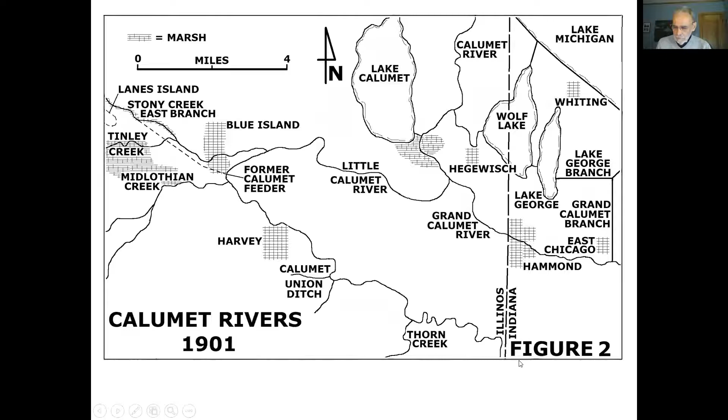Farther to the west along this Sag Valley, we see the Stony Creek flowing to the north and then south and on to the west through the feeder to the I&M Canal. Now, the Sanitary and Ship Canal had just been opened in 1900. There was no connection between the I&M Canal and its feeder and the Sanitary and Ship Canal.

Also shown are some of the natural drainage with the marshes along the valley bottom. A slight rise in the land here, Lanes Island, was the site of the village of Worth. Otherwise, there were no settlements along the Sag Valley until you got to Blue Island at the east.

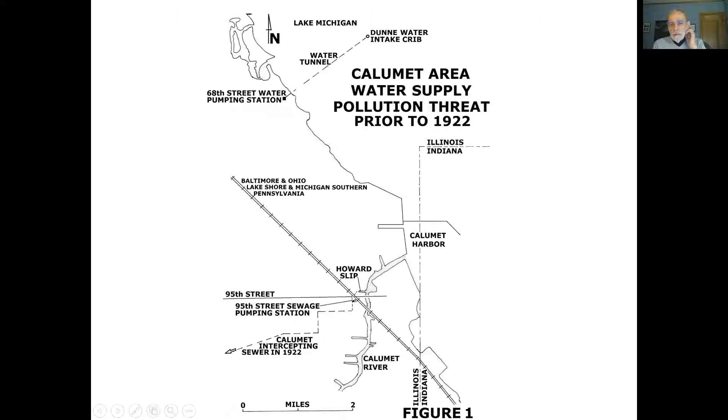This was a continuing threat for public health in the south side of the city. That was up until 1922 when the district implemented this plan to arrest the discharge of sewage into the Calumet River, by building a sewer that took away flow from the 95th Street pumping station. More detail on that in a little bit.

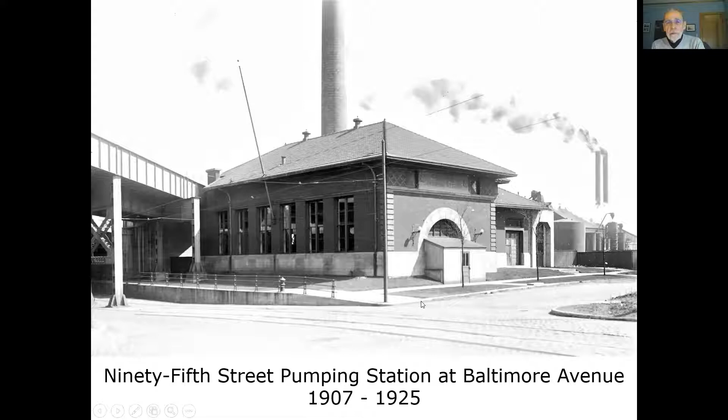So by 1911, it was known that dilution wouldn't solve the pollution problem for Lake Michigan or the Chicago River or the Calumet River. And the plan for the Calumet area was to build intercepting sewers to stop the discharge of sewage to the river, to build a pumping station to replace the 95th Street pumping station, and another one over near the plant that was to be built on 130th Street. And then a plant to treat the sewage and a canal to carry the treated sewage away from Lake Michigan.

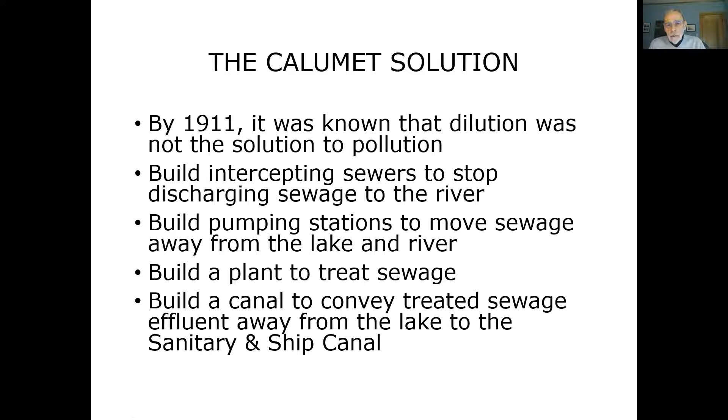The canal that was built, of course, was the Calumet Sag Channel, 16 miles in length from where it connected to the Sanitary and Ship Canal near Lemont, running east over to its connection with the Little Calumet River east of Blue Island in the village of what is now Calumet Park.

Originally, the plan was to extend the channel over to the mouth of Lake Calumet, but with the federal government opposed to any more diversion from Lake Michigan, the size of the channel was reduced and it was terminated at the Little Calumet River near Blue Island.

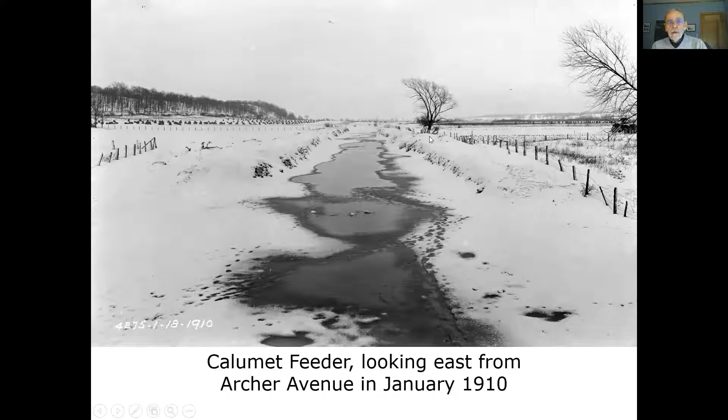Building this canal was a challenge. The Sag Valley was less inhabited than the valley of the Des Plaines River where the Sanitary and Ship Canal was built. Here we are at the west end from Archer Avenue looking east during the winter of 1910. This is the Calumet feeder, pretty much blocked by debris and vegetation by this time because it had stopped being used with the lack of business on the I&M Canal. And here we see the bluffs to the north and the south in the distance.

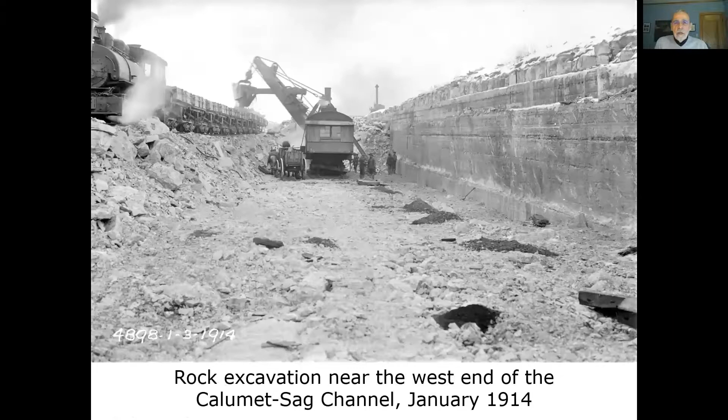The western 2.5 miles of the canal was in rock, and here by vertically cutting the wall of the rock for a channel, and then drilling and blasting the rock out, they excavated this channel. And the spoil was loaded and hauled away.

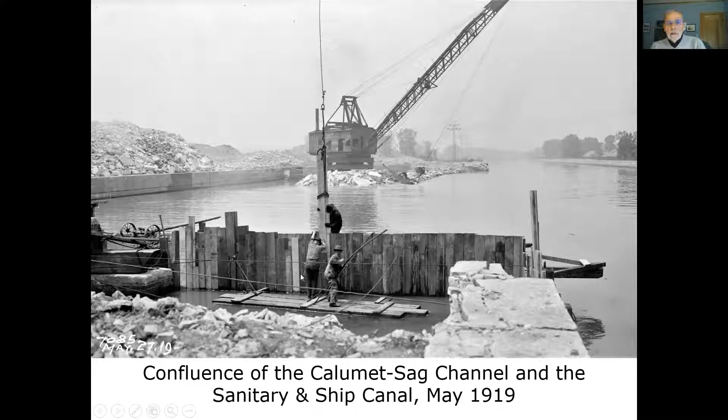A big challenge on this end was connecting the new Calumet Sag channel to the Sanitary and Ship Canal. The Sanitary and Ship Canal is over here on the right. With the new canal walls that were built, a dike was left here where the east wall of the Sanitary and Ship Canal was. All of the construction work on the new canal was done in the dry, and then this dike was removed here. You see the drag line working its way backwards, removing that fill. In the foreground, laborers are building a cofferdam to connect the old wall of the Sanitary and Ship Canal with a new wall of the Calumet Sag channel.

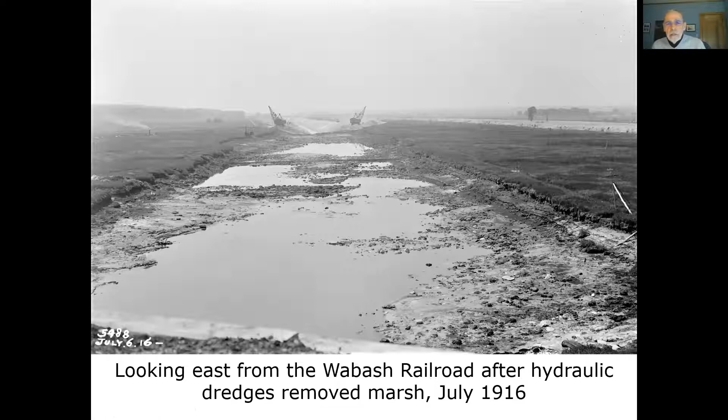This 11 miles of channel had unstable side slopes, and it was entirely lined with hand-placed rock riprap, a very labor-intensive process you see here. And the channel itself was only 60 feet wide, the same width as the Illinois and Michigan Canal, built half a century earlier. The small channel was because of the federal government not allowing more diversion, so only a small channel was needed.

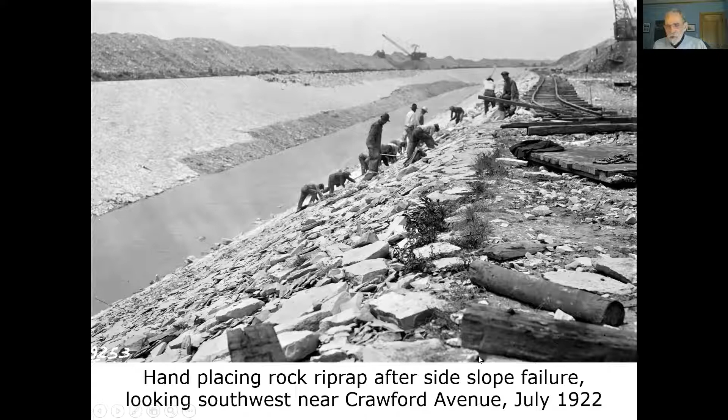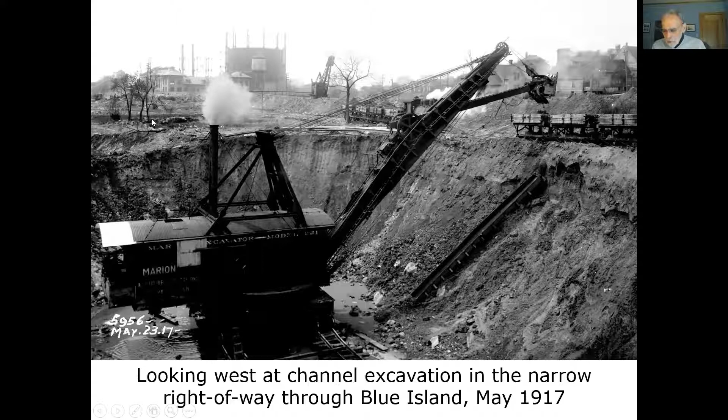The eastern 2.5 miles went through the city of Blue Island and over to the Little Calumet River. Working conditions were rather restricted going through the urban area of Blue Island. Here you see the gas plant in the background, and the channel is coming just to the south of the gas plant. Again, the spoil was loaded on rail cars and hauled away. And concrete walls were built here. There wasn't any rock at the depths of the channel. Sometimes the walls were founded on rock. It may have been down there 20 or 30 feet.

Here we are to the south of the gas plant. You see the village of Blue Island up on the higher ground here, a 60-foot wide channel contained within concrete walls. This is the contractor's way of moving his materials from a central concrete mixing plant to where the walls were being cast with this false work.

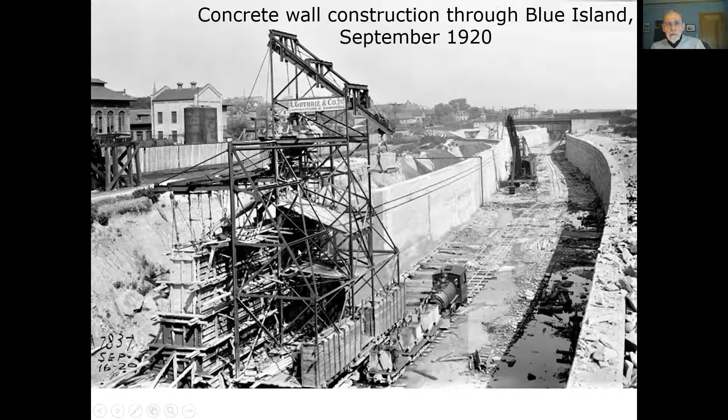At the very east end was the construction of the Blue Island Lock. The lock walls here, these two recesses are for horizontal sector gates. There are two more recesses in the back for the lock chamber to have gates at either end. And this is falsework and a stiff leg derrick for erecting the gates in these two recesses.

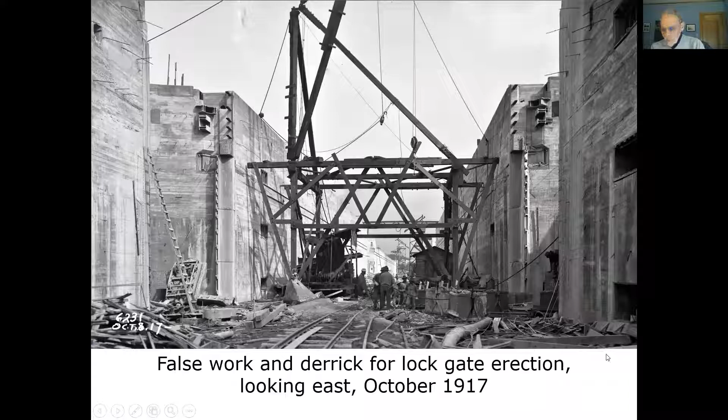At the very east end, we had this levee along the river. Here's the Little Calumet River in the background. The levee isolates the work area from the river, and one canal wall, the north wall, is coming up here and tying into the higher ground. In the background is the south wall. And in the right background is the lock construction.

Oh, this was very challenging to complete this channel, and it took 11 years, started in 1911 and ended in 1922. A large part of the delay was due to World War I and the delay in obtaining materials, shortage of labor because young men were going to fight the battles in Europe, and also a lot of railroad equipment was embargoed by the federal government to use for moving war goods to the seaboard.

As I said, there were many railroads. There were 7 railroads that had to be crossed. This was the Wabash Railroad. Can you see here, the new bridge is raised up above the valley floor. They didn't like the track flooding, so the railroad built the bridge, but the district paid for the bridge. The railroad paid for raising the embankment on each side of the valley floor to raise the grade above the flood levels.

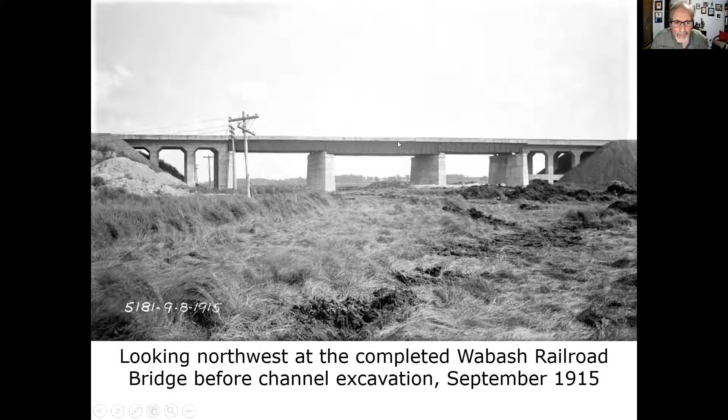Another was, here we are in Blue Island, looking north. This is Western Avenue coming down, and the original bridge crossing Stony Creek was right at this location. They're building a new bridge to cross the new channel because the channel was built right in the bed of Stony Creek. A bypass was built around here so Western Avenue traffic could continue. And over to the right, we see the embankment of the Rock Island Railroad. Stony Creek is still flowing underneath all of this in a wooden flume under Western Avenue, under the railroad, and on over to the river.

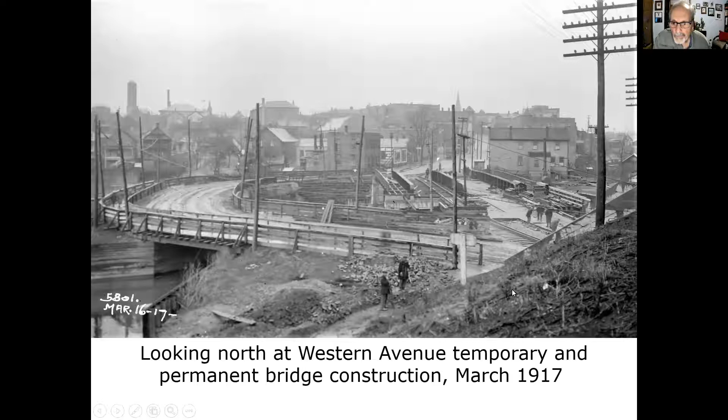Here's the railroad bridge just east of Western Avenue, and the 2 walls of the channel. The railroad for construction is here with a break left in the wall for access. Now today, if you drive through Blue Island on Western Avenue, you don't go under the Rock Island Railroad, you go over it. So that construction occurred later when the Calumet Sag Channel was widened in the 1950s and 60s.

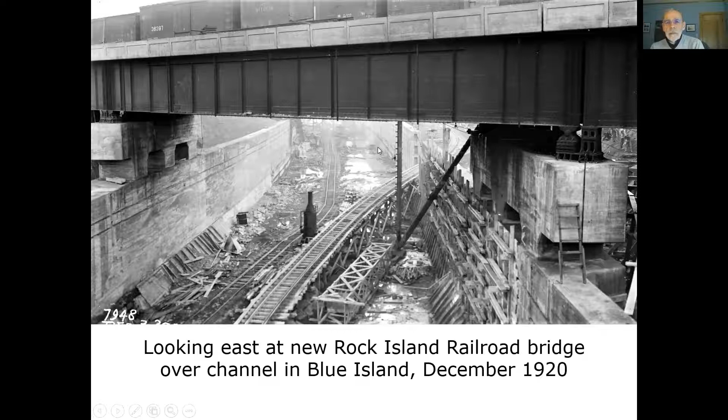Typical road bridge away from Blue Island. In Blue Island, the bridges were a little wider and they had sidewalks, but these road bridges outside of Blue Island had no sidewalks. And you can see this very slow speed limit to cross the bridge.

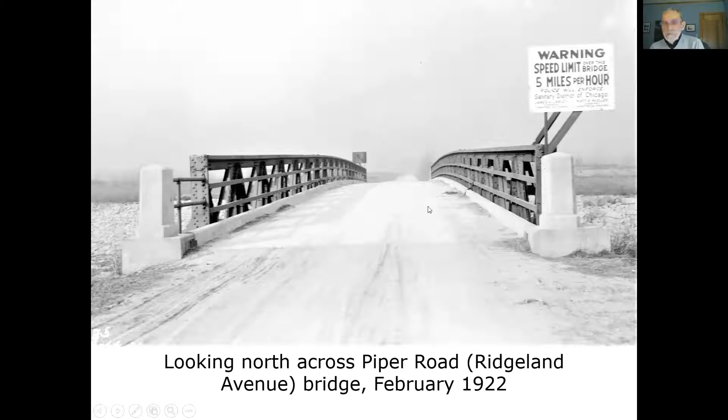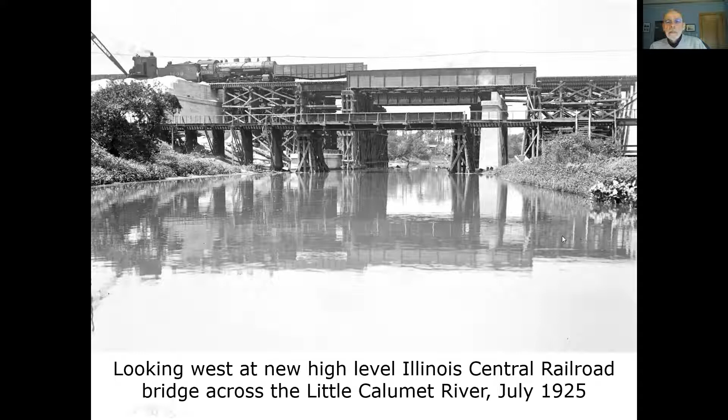East of Blue Island, we're on the Little Calumet River. This part of the river incidentally had to be widened and dredged to improve the flow conditions. But at the same time, by chance, the Illinois Central Railroad is building a new bridge for its line crossing the river near Riverdale. And it's a photograph of that reconstruction.

The 7-mile reach from the Blue Island Lock east to Lake Calumet was dredged. This was a large hydraulic dredge contracted with the Great Lakes Dredge and Dock Company. This work was completed in the mid-20s. And so finally we had a complete new channel from Lake Calumet all the way west to the Sanitary and Ship Canal near Lemont.

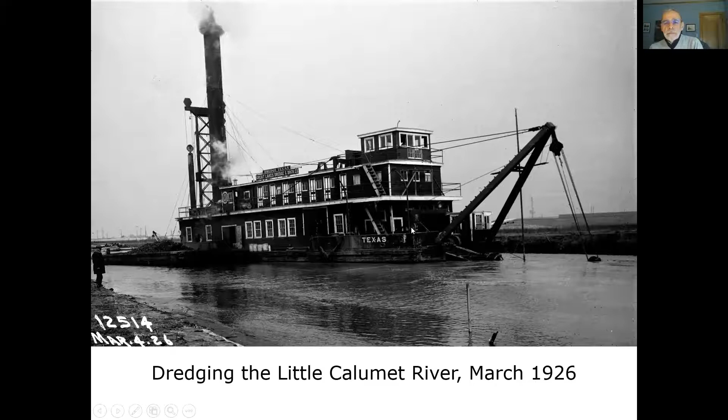Interesting map here of an improvement made in the Calumet River south of Lake Calumet. Here's Lake Calumet and the Calumet River coming from Lake Michigan, crossing under 130th Street and continuing. The original river channel meandered to the east and crossed under Torrance Avenue. And at this point, there was a confluence of the Little Calumet River and the Grand Calumet River. So there were 2 bridges for Torrance Avenue.

In the 30s, the Corps of Engineers was authorized by Congress to straighten the Calumet River, and they did so in a straight line basically from 130th Street down here to the channel west of Torrance Avenue. So Torrance Avenue could now continue in a straight line with one bridge, and this channel was eliminated.

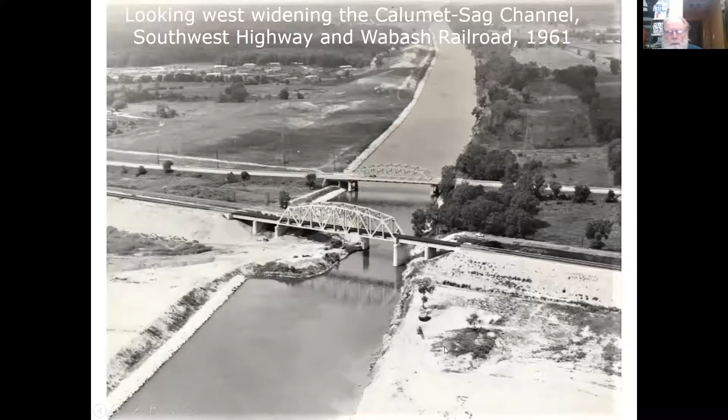Also, in the 30s, actually in the late 20s, there were thoughts about widening the Calumet Sag Channel and the Little Calumet River over to Lake Calumet. But due to the Depression during the 30s and World War II, that project didn't get off the ground. But it was authorized by Congress in 1946.

And after design and planning work, money flowed and construction began in 1955 to widen the Calumet Sag Channel from the Sanitary and Ship Canal all the way east over to the Little Calumet River. So here you see the Wabash Railroad, and this is a new bridge. The channel was about this wide under the old bridge. And so you see how much wider the channel is now, 4 times wider than it had been.

And that was done for the improvement of navigation, because once that channel was there, and with the industrial complex developing over in the Calumet area around the southern end of Lake Michigan, barge traffic wanted to move to Calumet Harbor by a shorter route rather than having to go through the Chicago Harbor and across the lake. So the pressure was on, and then this project was approved.

And as I said, construction began in 1955. It lasted till about 1970. The channel was widened. The Little Calumet River was widened over to the mouth of Lake Calumet, and a new lock was built.

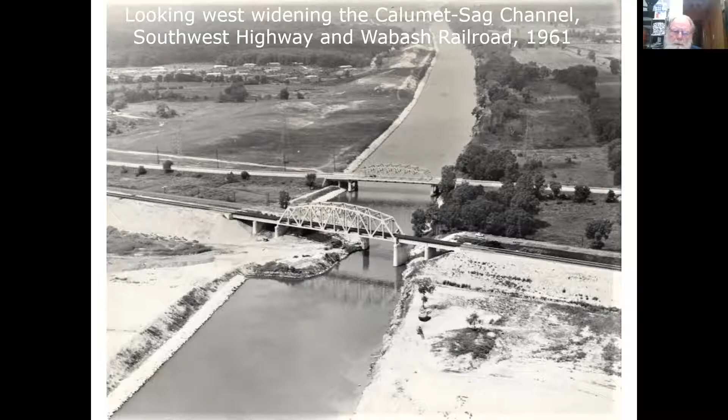The O'Brien Lock and Dam is on the Calumet River. This was that new stretch of river that was built in the 30s, and the new, much larger lock than the old Blue Island lock could accommodate several barges and a towboat at the same time. In addition to a lock, a dam or a barrier wall crosses the channel, linking to the eastern shore of the river, and sluice gates are there for the control of water other than the water that goes through the lock.

So much for channel construction. That was the last of the channel construction. That was about 1970 when the channel construction was completed. And since then, there's been no increase in the channels serving the Chicago area. We'll talk about the sewers, the development of the sewers plan.

Here's an old Chicago sewer map from 1908. It does show the original plan to build the channel over to the mouth of Lake Calumet. It also shows Hyde Lake, which was practically eliminated by that time anyway. But here are Chicago sewers flowing into the Calumet River. There's the Calumet pumping station. It pumped right into the river at 95th Street. A network of sewers over in the Roseland area, Pullman area, et cetera, discharging to Lake Calumet.

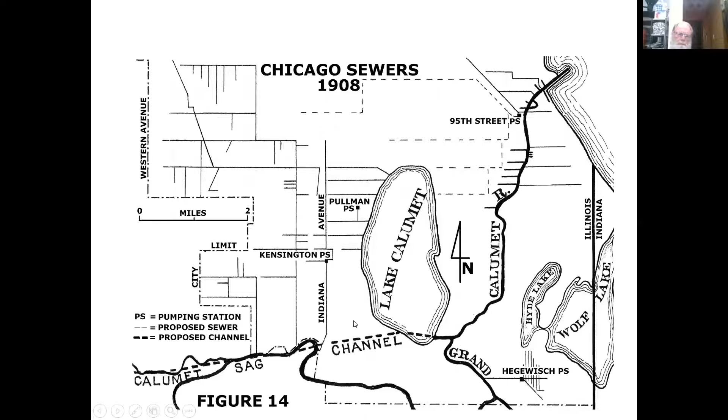Now, what the district did basically was they built the sewers that picked up all of these sewers discharging to the river, conveyed them and pumped them from a new station built adjacent to the city station here at 95th Street, in a new sewer that ran across the north end of Lake Calumet, down South Park, Indiana, and Prairie Avenues to the location of a new pumping station here and also a new plant where the sewage was treated before it was conveyed over to the Calumet Sag Channel. And after many, many years, this network of sewers has expanded to where it is today, serving the entire south area.

So focusing back on that area around Lake Calumet, the new 95th Street pumping station and the intercepting sewers, picking up the sewage, conveying it across the north end of Lake Calumet to the new pumping station and the Calumet plant. That was the original construction, serving basically the south side of the city. The south suburbs were developing.

The next interceptor came in from the south, the Harvey interceptor, bringing in sewage from Harvey, Phoenix, Dixmoor, and so forth, South Holland. And then the third major interceptor was the Calumet City intercepting sewer, bringing in sewage from Lansing, Calumet City, Burnham, and picking up the community of Hegewisch.

Later, as suburban growth continued, that system was extended south all the way to the county line to pick up sewage in several far south suburbs. The fourth major intercepting sewer coming into the plant was from the west, the Blue Island interceptor, initially built to serve the Blue Island area and areas in the south part of the city, Merrionette Park and so forth.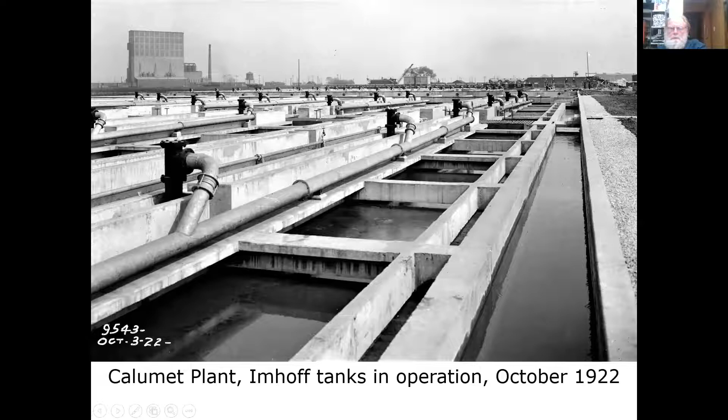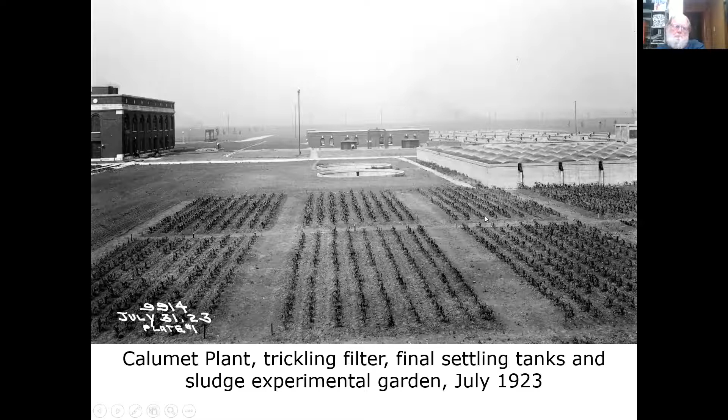This plant, after the Imhoff tank, the effluent was polished in what is called a trickling filter. And then that was passed through settling tanks to remove solids to achieve the maximum quality they could at the day. Around the plant site, they also had farm plots. The dried solids were used as fertilizer in these plots. These were test plots. They raised different types of produce to gauge the benefit of using sludge as a fertilizer.

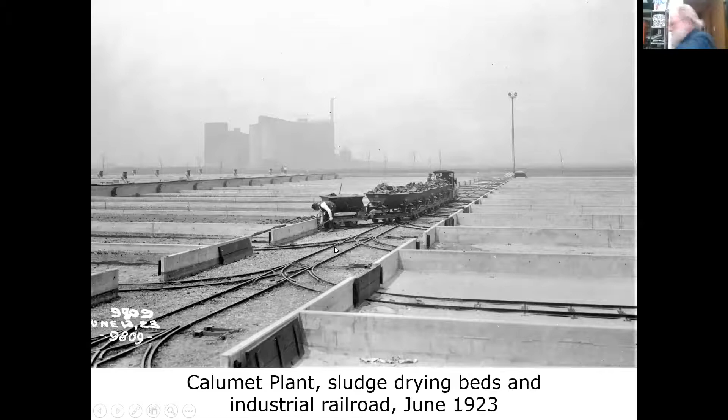The solids that were settled on the Imhoff tanks were spread out on these drying beds and dried in the atmosphere. And then it was a manual labor process to scoop up the dried solids, put them in small rail cars and haul them to a dump. This labor-intensive process was the attempt to mechanize it. And so this was a homemade digging device that was used successfully to clean the sludge off the beds.

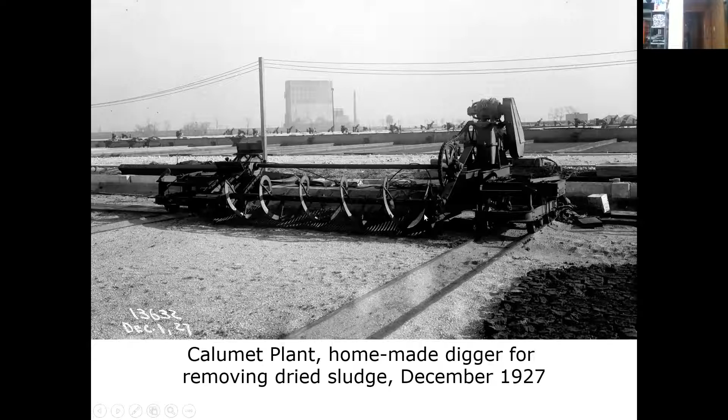So this was another part of the plant. They were testing the new process called the activated sludge process. Part of the tankage was built differently to serve that purpose. This was the operating gallery and final settling tanks. Behind the gallery were aeration tanks. That is the process that is used universally today at all water reclamation plants in the Chicago area. And it is pretty much the standard technology of the wastewater business.

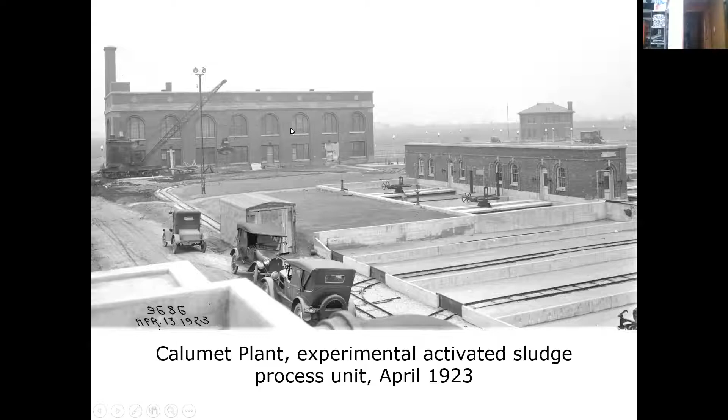Also in this photo is the machinery building. We'll go inside that in a minute and look at the construction of a rotary drum vacuum filter. This was used as an alternative for air drying on those drying beds. The liquid slurry sludge would be fed onto this rotating drum. It had a blanket type material on it. And with a vacuum inside, it would draw the water out and create a pancake batter consistency material that could be then spread on the ground. It could be piped and didn't have to be shoveled. Anyway, so there are a lot of innovative things going on here at Calumet.

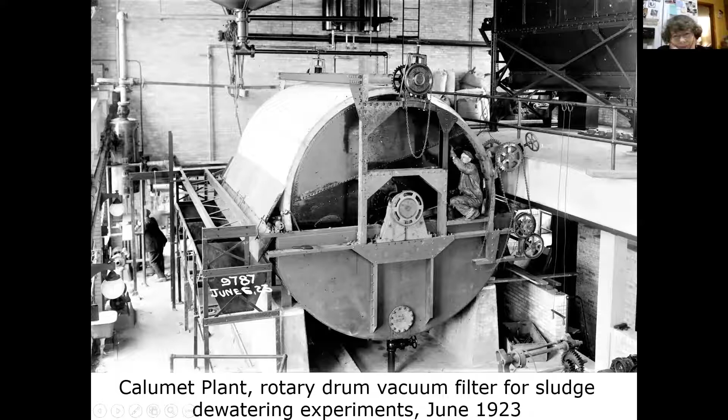Of course, today the Calumet plant is much different, much bigger. That original plant lasted for about 10 years. A new plant was built just to the south of it, where the site is now. Here's the present day plant. We're looking north toward downtown Chicago. The original plant was located right about in this area.

This plant now, this is a new pumping station, aeration tanks here all over the place, digestion tanks for the sludge. These are the final clarifying tanks. Over here, this smaller building is the pumping station for the deep tunnel that serves the Calumet area. And in the background are large lagoons for the storage of sludge.

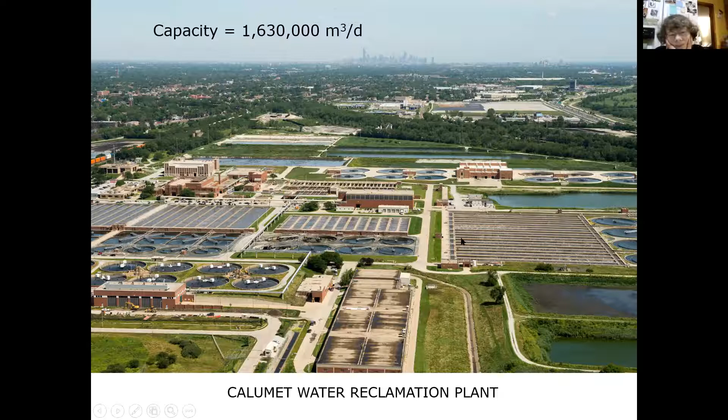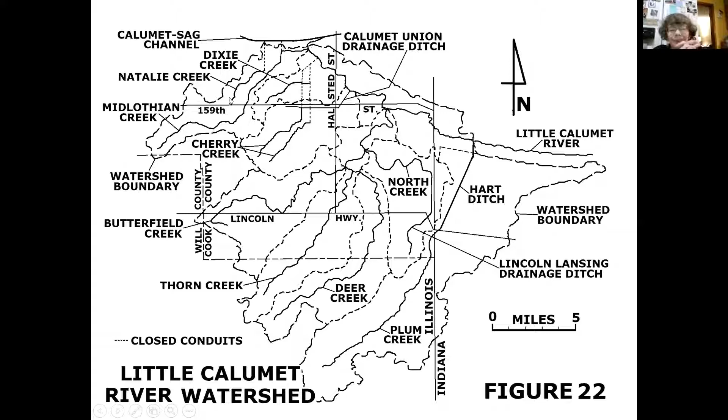As part of the Water Reclamation District's responsibility for stormwater management, they've developed a plan for the Little Calumet River watershed, which is part of the Calumet area. Also a plan to the west of this for the Calumet Sag Channel area. But several flood control reservoirs have been built in the Little Calumet River watershed.

And on this map, we also see Hart Ditch. That was the extension of Plum Creek, excavated by Mr. Hart through the Beach Ridge for a new outlet to the Little Calumet River. So this was the area of that Cady Marsh. One of its outlets originally was through North Creek and Thorn Creek around the west end of the Beach Ridge.

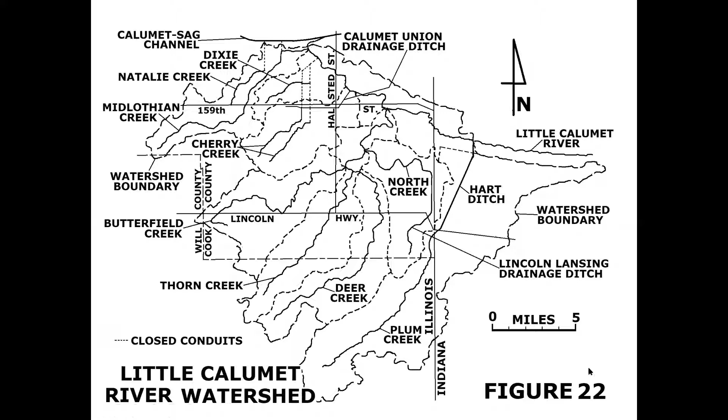Now there is a Lincoln-Lansing drainage district in the area. It was formed about 100 years ago to drain the marshy areas to increase agricultural production. It's still in existence. There's another drainage district in the Calumet area, the Calumet Union Drainage District #1, near South Holland and Markham. Both of these drainage districts, in my view, are outmoded. They don't serve a necessary function today. The drainage responsibilities have been taken over by the Water Reclamation District through its stormwater management responsibilities. But in Illinois, we have a habit of not getting rid of unnecessary governmental units, so they're still around.

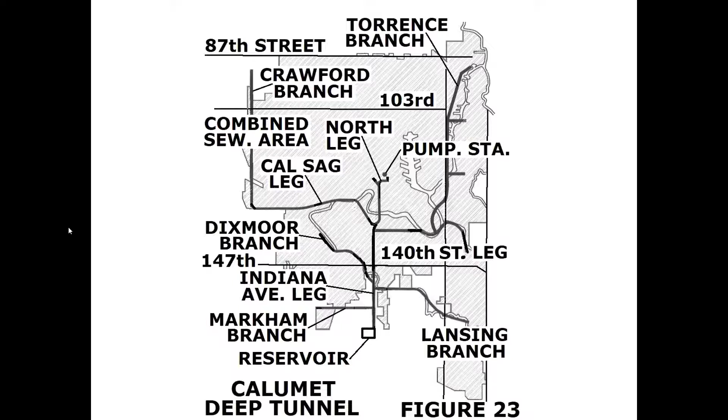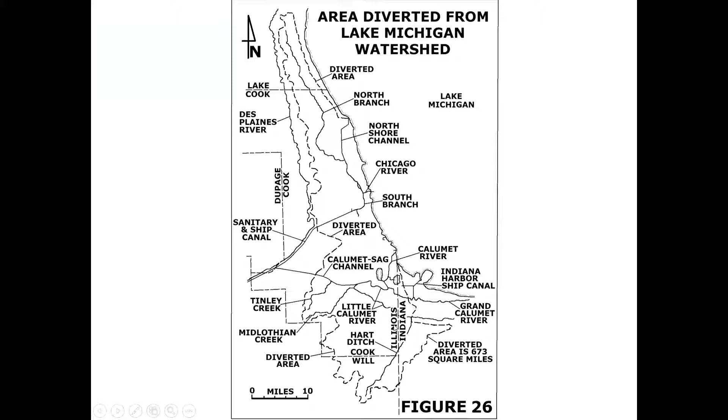And last but not least, I end this book with a chapter on lake diversion, which covers the entire history starting in 1898 with the litigation from St. Louis up to the present time under the Supreme Court decree allowing Illinois to divert a quantity of water from Lake Michigan. So the diverted area is shown here, 673 square miles, which formerly drained to Lake Michigan and now drains to the Des Plaines, Illinois and Mississippi Rivers via the allowable diversion and the reversal of flow of both the Chicago and the Calumet Rivers.

That's basically the end of my presentation. I want to thank you for listening, and I hope it's been informative. The title of the book is Calumet First and Forever. I guess you should realize what the first means by now; I've pointed out many of the firsts. And the forever is that I'm personally convinced the plant name should never be changed. The commissioners at the Water Reclamation District have the authority to change names, and they've changed the names of many plants to honor former commissioners who have long been forgotten. But in the case of Calumet, it should always be called the Calumet plant because that's the area it is in, and it has a strong historical connection to this area.